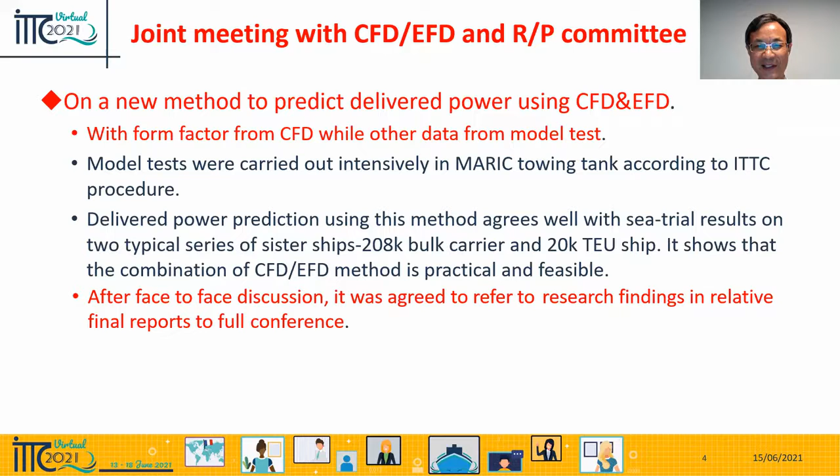SOS has contacted the CFD-EFD committee on how to proceed with CFD-related issues, and the R/P committee regarding the load variation coefficient. SOS also contacted the Maneuvering in Waves committee and Quality System Group. A joint meeting was also held with CFD-EFD and R/P committees on a new method to predict delivered power using CFD and EFD, with the form factor from CFD, while other data from model tests. After face-to-face discussion, it was agreed to refer to research findings in relative final reports to the full conference.

From the AC Chairman, SOS has got major comments from IMO MEPC meetings. Either the Raven method should be improved with sufficient validation, or a new method should be proposed. ITTC sea trial procedure 2017 version was accepted by MEPC 73. The 2014 guidelines shall be updated accordingly to reflect the new progress. Discussion on EEDI phase 4 and early implementation for container ships, because they are far below the current baseline. Terms of reference after coordination with AC.

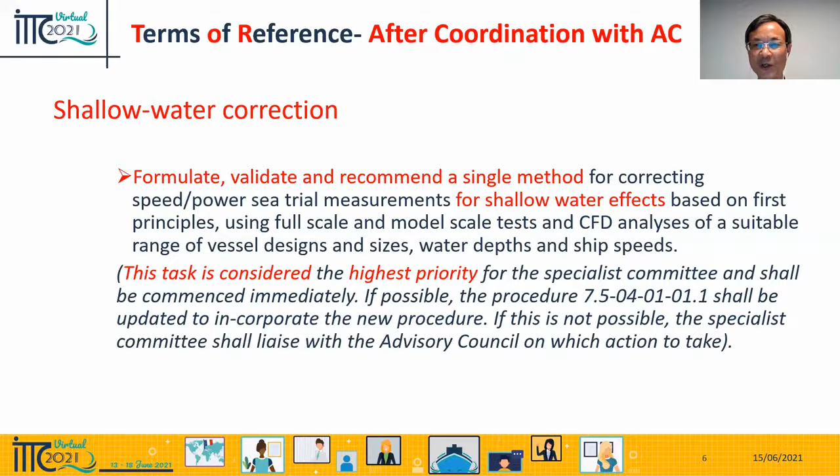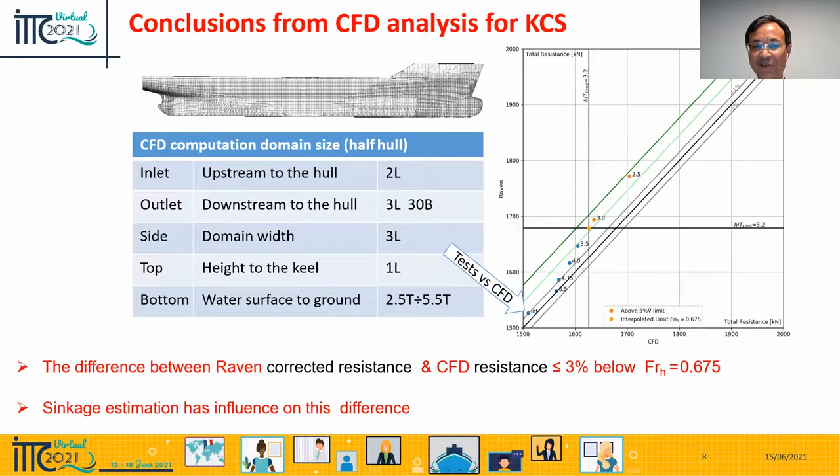Shallow water correction: to formulate, validate, and recommend a single method for shallow water effect. This task is considered the highest priority. During this term, work conducted includes CFD analysis, model tests, and a new water depth limits study. Conclusions from CFD analysis for KCS: the difference between the Raven method and CFD method is within 3% below a water depth Froude number 0.675. Sinkage estimation has influence on this difference.

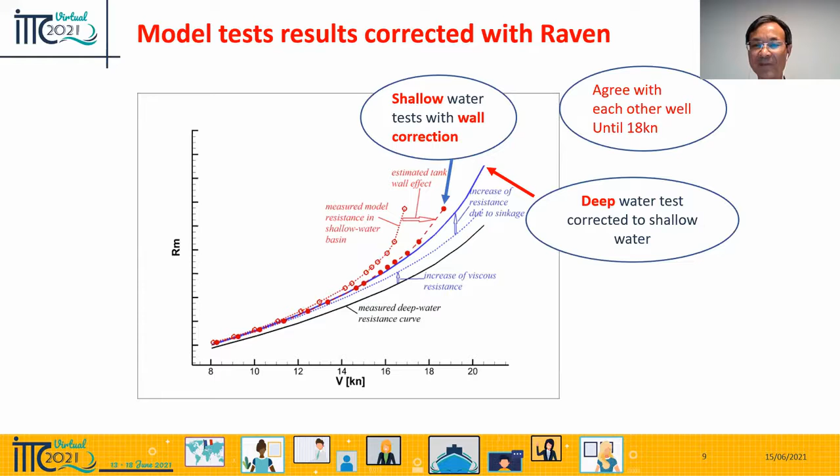Model test results corrected with the Raven method: shallow water test with wall correction and deep water test corrected to shallow water agree with each other quite well until 18 knots. After further study, SOS concludes the Raven method provides more consistent and accurate correlation, thus it is accepted by SOS as the only method for shallow water correction.

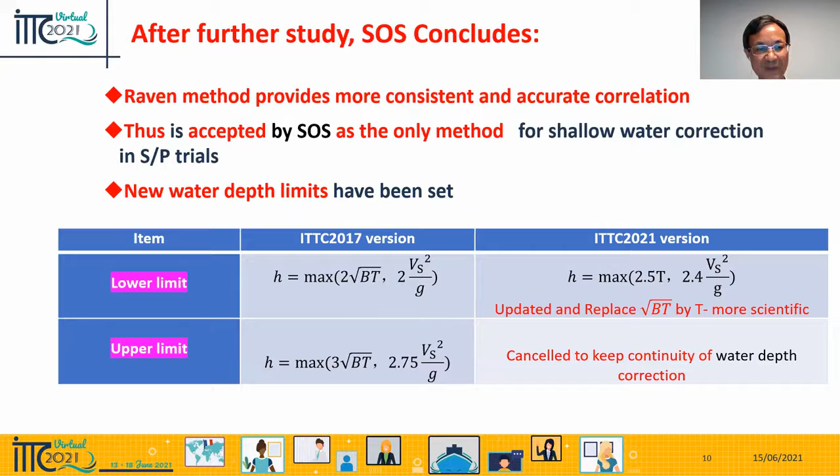New water depth limits have been set. For the lower limit, it was updated and replaced square root of BT by T. This is more scientific. For the upper limit, it was cancelled to keep continuity of water depth correction.

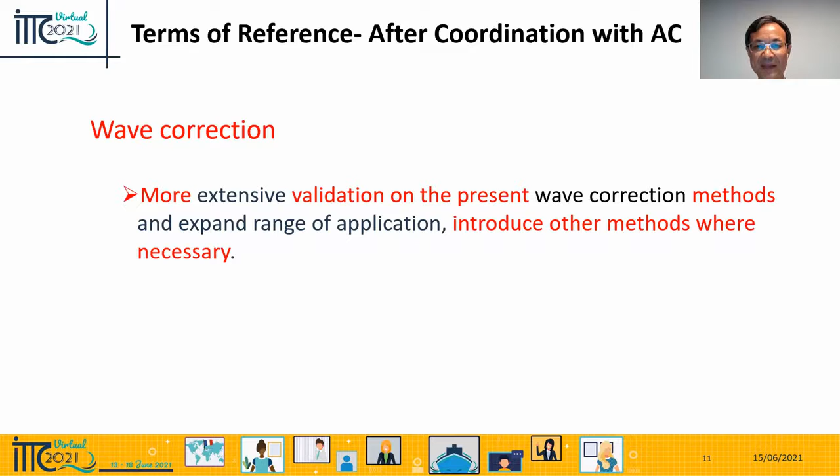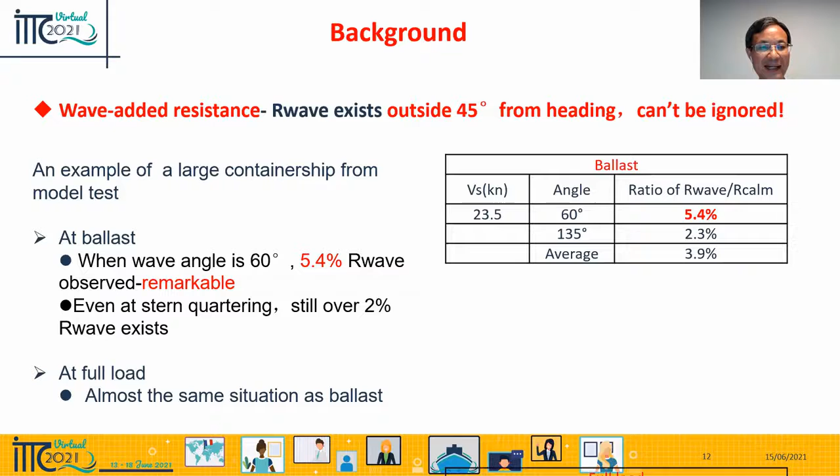Wave correction: more extensive validation on the present methods, and introduce other methods when necessary. It is observed wave added resistance outside 45 degrees from heading cannot be ignored. This is an example of a large container ship from model test. At ballast, when wave angle is 60 degrees, 5.4% R wave is observed. This is very remarkable. In fact, even at a stern quartering, still over 2% R wave exists. At full load, almost the same situation as ballast.

In the ITTC trial procedure, it has clearly specified the ship should head into the dominant wave or wind. However, for large vessels such as VLCC and VLOC, 1+2+1 double runs could last about 10 hours. During this period, wave direction is likely to change over 45 degrees. While the iterative method is often used, the heading is required unchanged. This is the first situation.

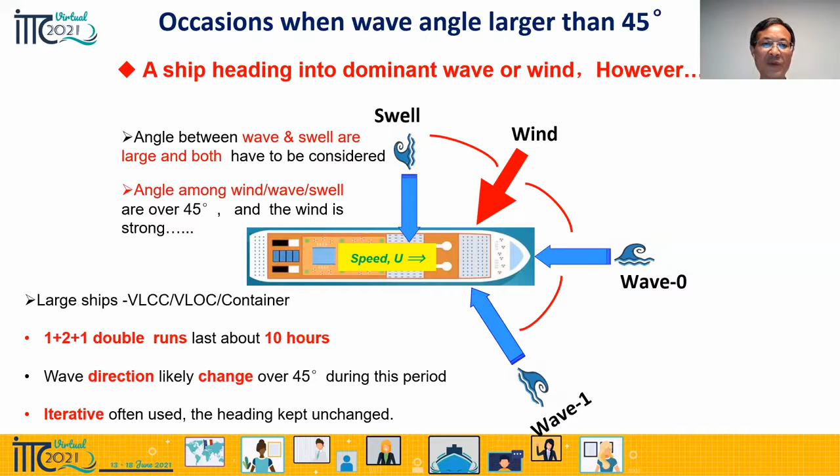Another situation is when the angle between wave and swell is large and both have to be considered. Another situation is when the angle among wind, wave, and swell is over 45 and the wind is strong. For such kind of case, we will have the chance to encounter wave angles larger than 45. Unfortunately, the present empirical method can't deal with the above situations when ship lines are not available. Thus, it is necessary to develop a new empirical method to cover wide wave angles when ship lines are not available.

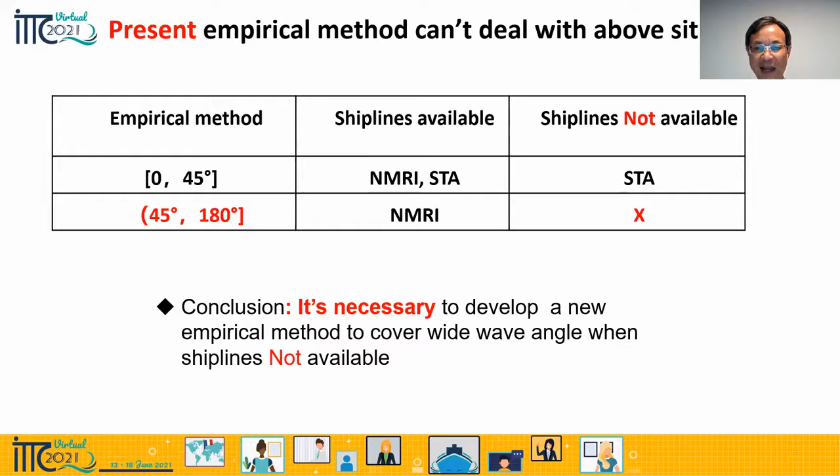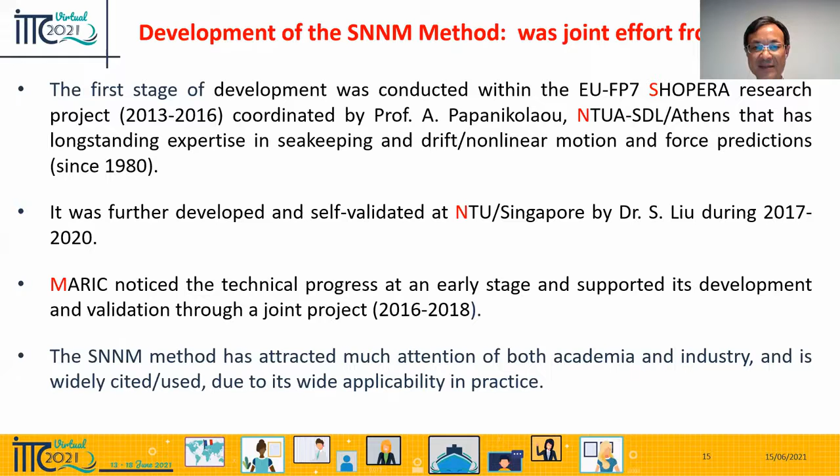Development of the new method was a joint effort from SHOPERA, NTUA from Athens, NTU from Singapore, and MARIC from China. The new method was on the basis of Faltinsen and J&F formula, with two important improvements.

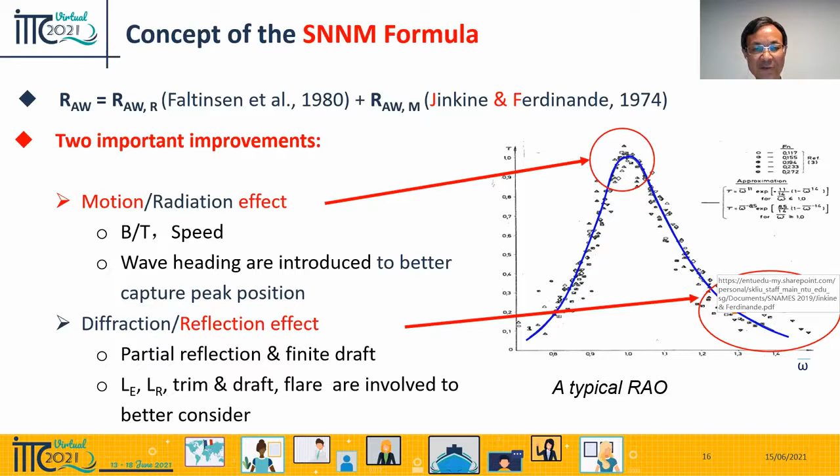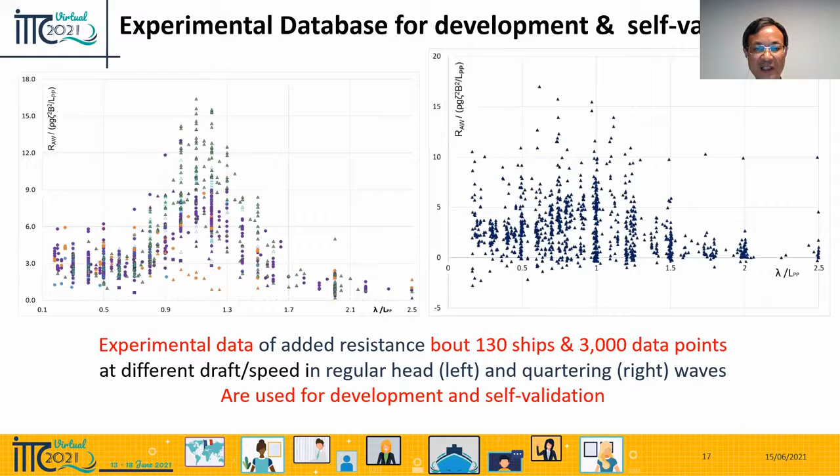B over T, speed, and wave heading are introduced to better capture peak position, to better simulate motion effect, while partial reflection and finite draft, length of entrance and run, trim and draft, and flare are involved to better consider reflection effect. Experimental data of about 130 ships and 3,000 data points are used for development and self-validation of the new method.

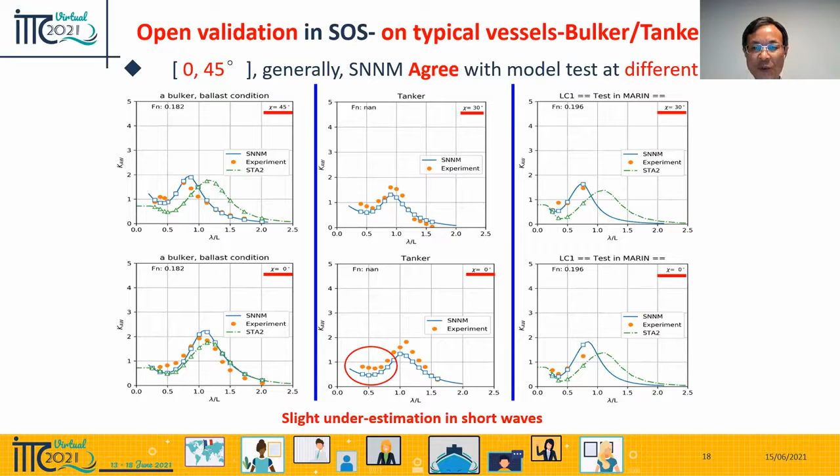Open validation in SOS on typical commercial vessels: bulkers, tankers, and containers. In the first region, from 0 to 45 degrees, generally the new method agreed with model test at different angles, although slight underestimation in short waves was observed. While in another region, from bow quartering until following, the new method agreed with model test at different Froude numbers and different wave angles.

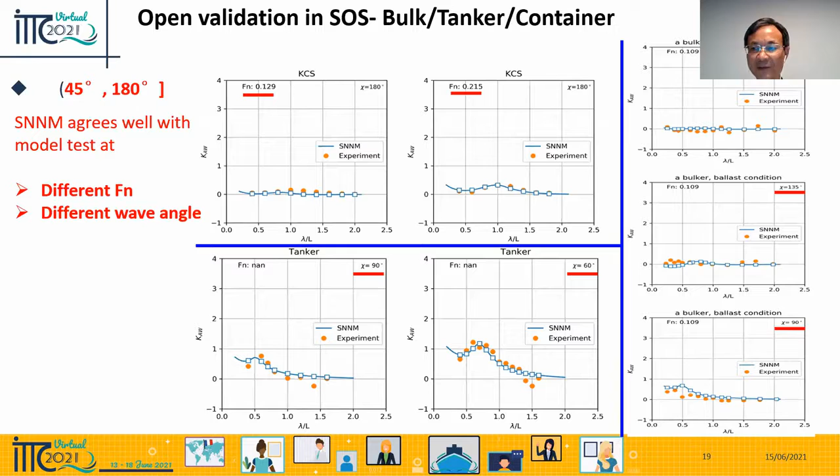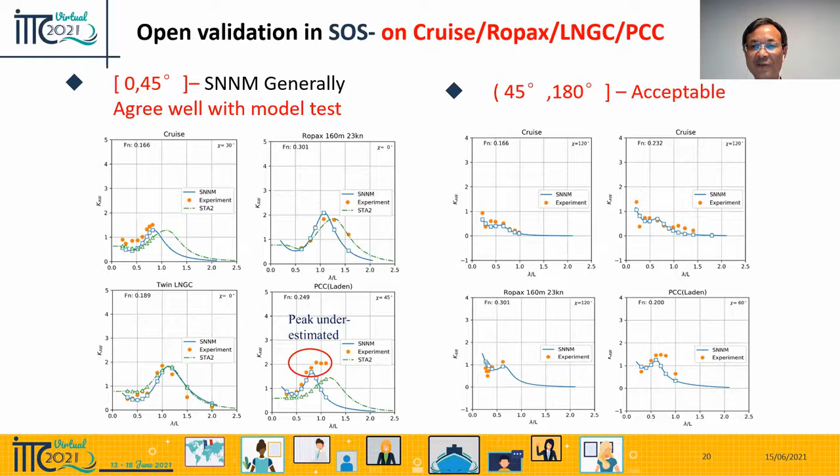Open validation on other vessels, such as cruise ships, RoPax, LNGC, PCC, etc. In the first region, from 0 to 45 degrees, the new method generally agreed with model test, while in the other region, from 45 to following, the result is acceptable.

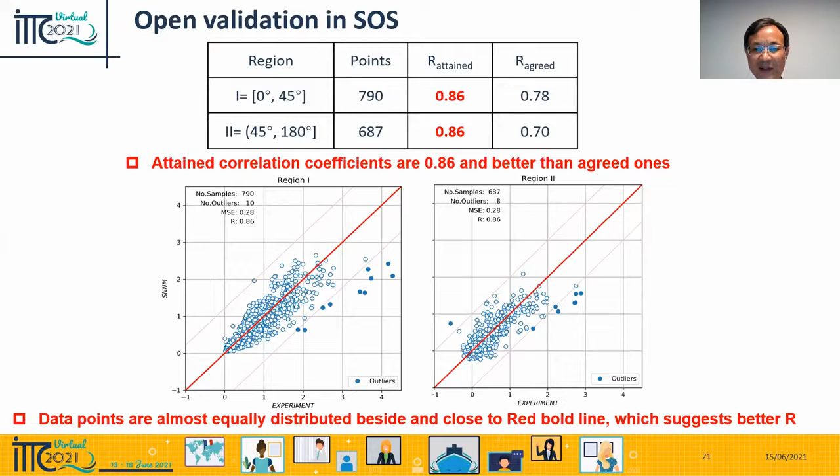From the open validation in SOS, we can see from the table the correlation coefficient is 0.86. This is much higher than the agreed ones. And also from the figures, we can see data points are almost equally distributed beside and close to the red bold line, which suggests a good correlation factor.

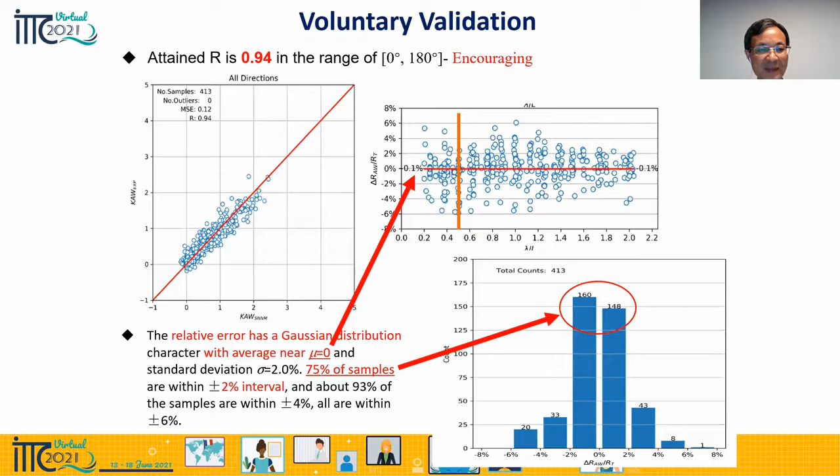As to voluntary validation, the correlation coefficient is 0.94 in the whole range. This result is quite encouraging, and the relative error has a Gaussian distribution with average near 0, and 75% of sample points are within 2% interval.

Summary and conclusion on this new method validation. On March 16, an AC meeting was held to discuss the method. After further discussion and voting, AC agreed to include the method into the sea trial procedure, thus to make the procedure more complete, competent, and valuable.

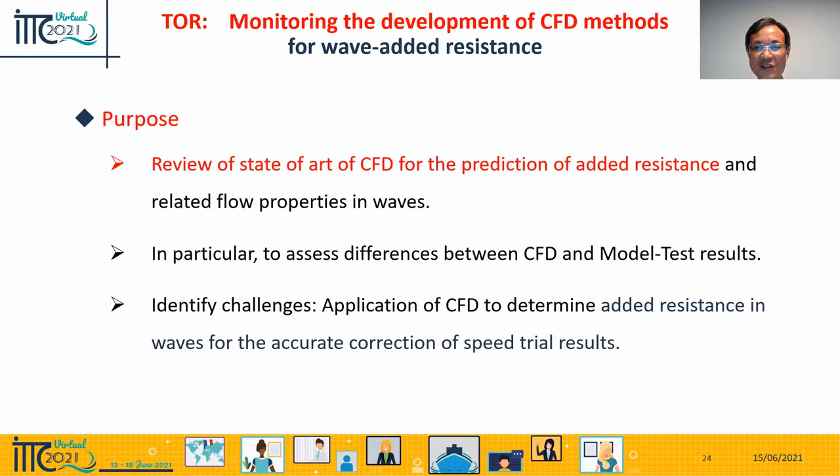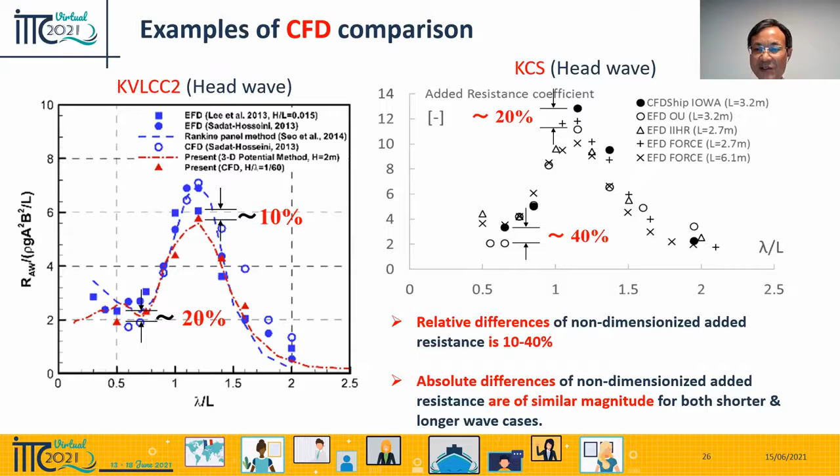From the comparison, we can see relative differences of non-dimensionalized added resistance are within the range of 10 to 40%, while the absolute differences are of similar magnitude for both shorter and longer wave cases.

This is the experimental data of all headings available. We have S175, KCS, etc. at different speeds, at different model lengths, from different model basins. Generally, open test data with geometry is not enough for CFD to compare. Thus, to have high fidelity test data of different hull forms from different facilities is important.

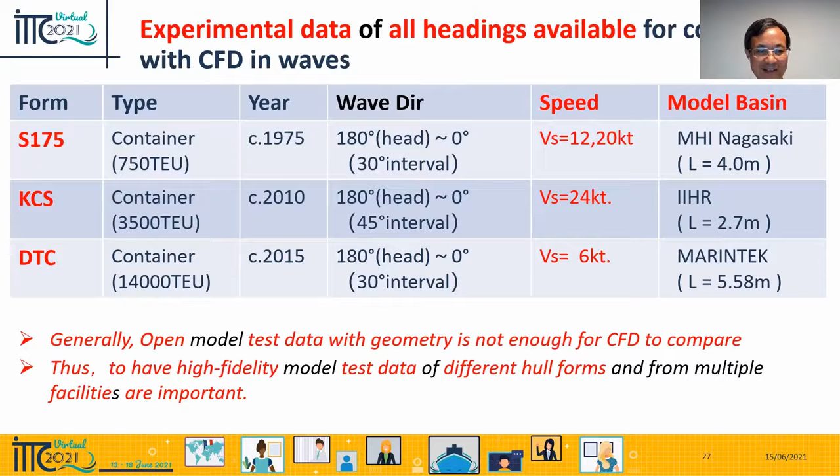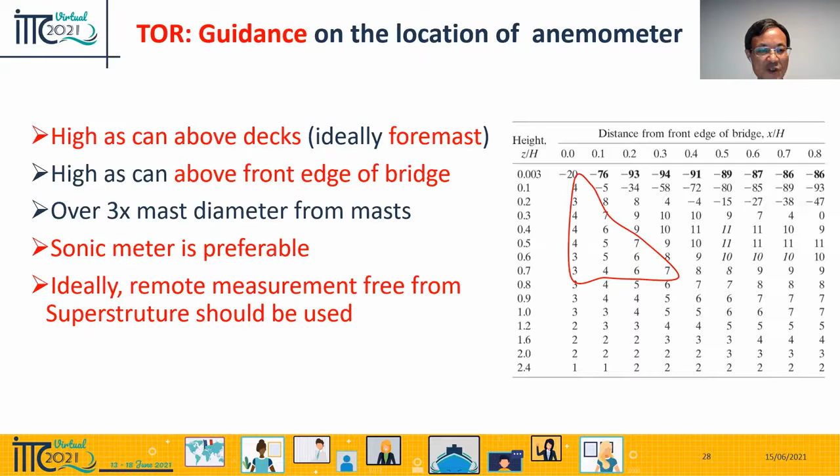Guidance on the location of the anemometer: as high as can be above decks, above the front edge of the bridge, and the sonic meter is preferable. Ideally, remote measurement free from superstructure should be used. This is a comparison of meter location and the filtering process.

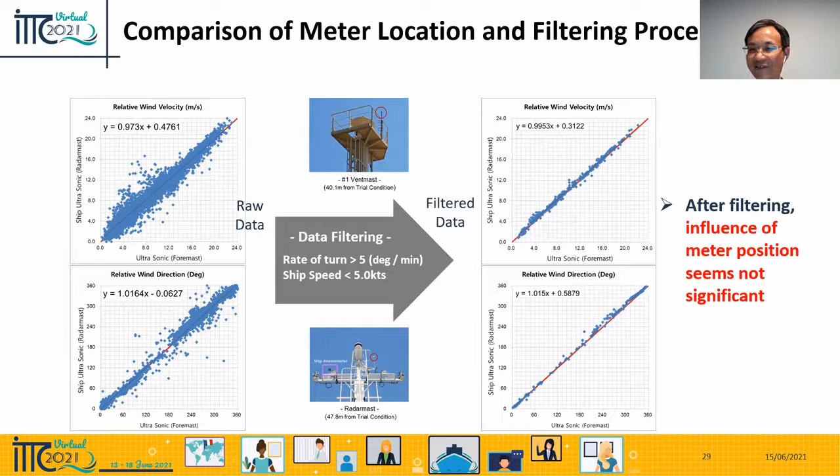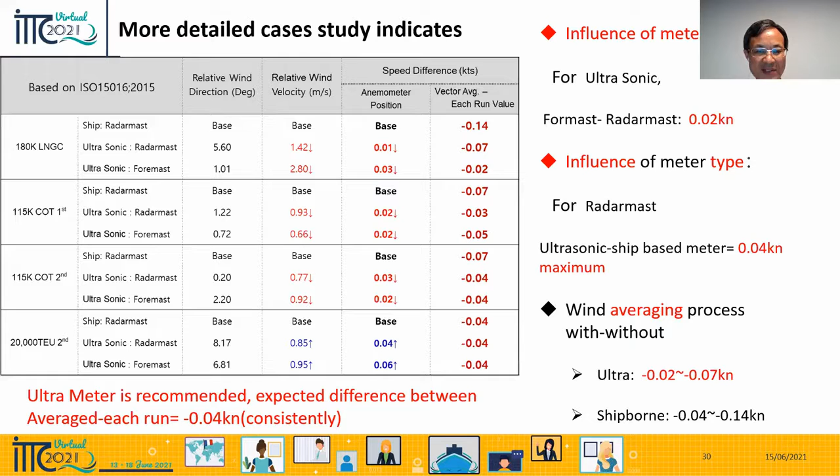After filtering, we can see the influence of meter position seems not so significant, with a difference of 0.02 knots, while the influence of meter type is 0.04 knots maximum. And the wind averaging process with and without the ultra meter is minus 0.02 to minus 0.07 knots. So the ultra meter is recommended, and the expected difference between averaged and each run is minus 0.04 knots. This result is consistently negative.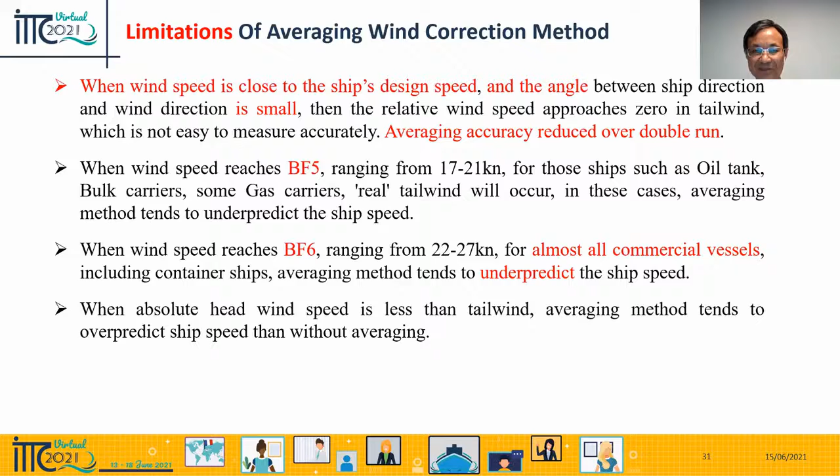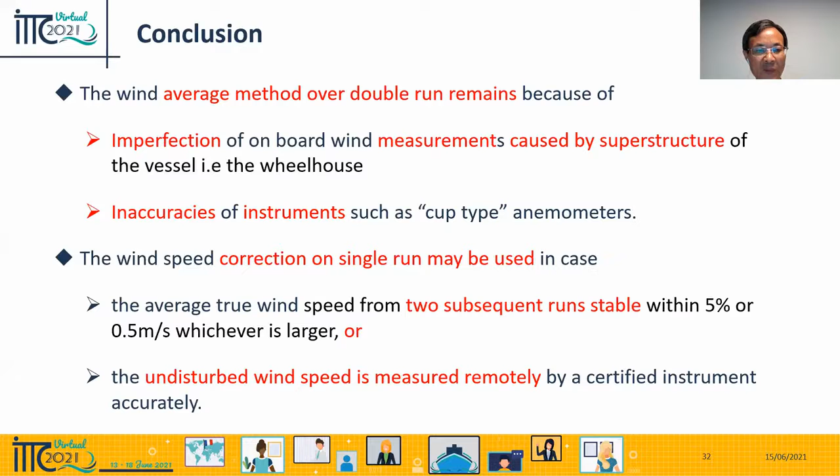Conclusion from the study: the wind averaging method over the double run still remains because of imperfect measurement caused by superstructure and inaccuracies of instruments such as cup type. However, correction on a single run may be used in case two subsequent runs are stable or undisturbed wind speed is measured remotely.

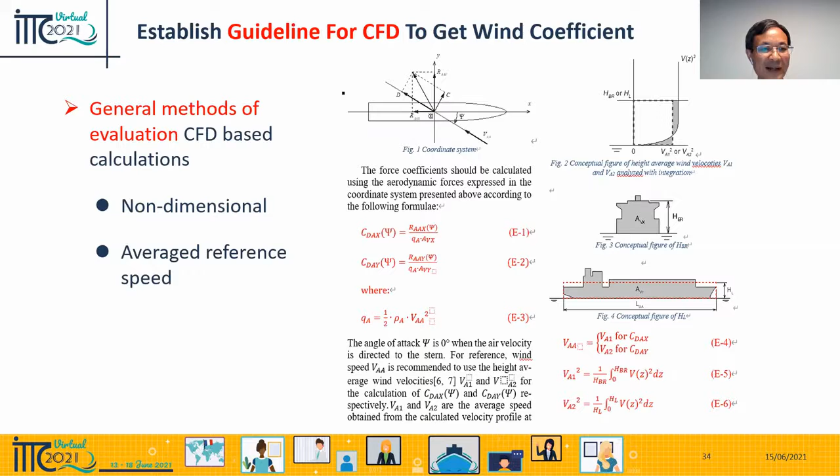Establish guideline for CFD to get wind coefficient. This is a completely new guideline, which includes two parts. The first part is general practice for CFD approach, while another part is general methods of evaluation.

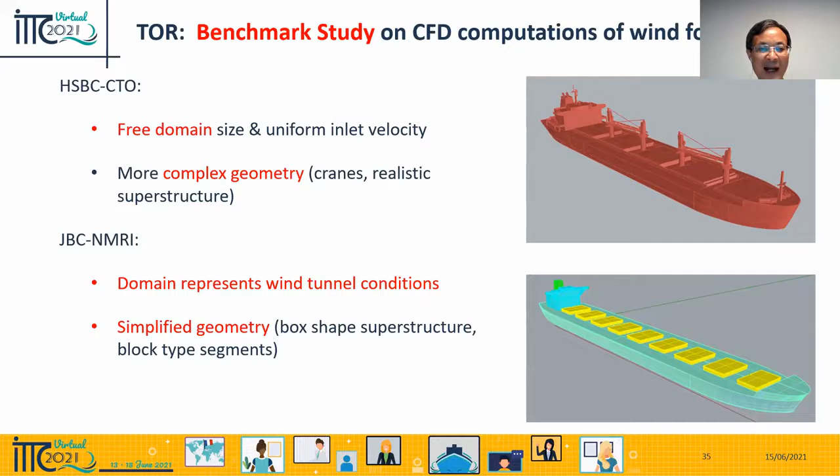Two cases are used for benchmark study: one is HSBC from CTO, another is JBC from NMRI. From the comparison between CFD and wind tunnel test, we can see for HSBC the difference is about 25%, while for JBC it is about 20%.

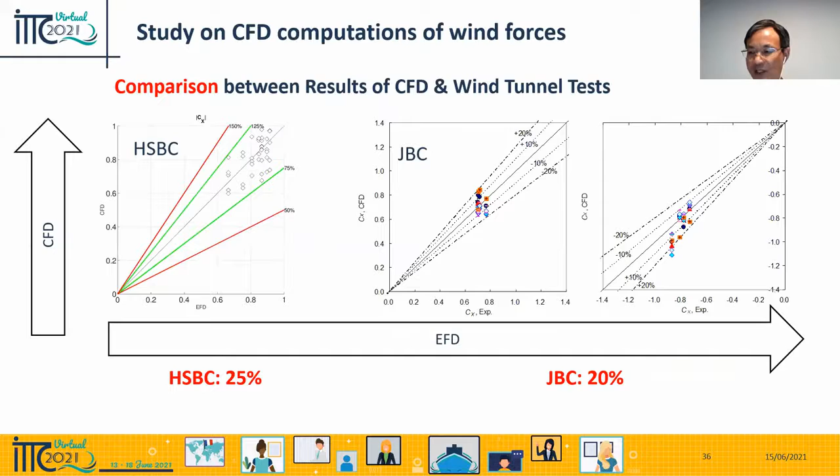Averaged wind velocities as representative wind velocity are used here. We are surprised to find for both JBC and HSBC, RMSPE of CX remarkably reduced after using averaged wind speed as reference. From the right figures, you can see this.

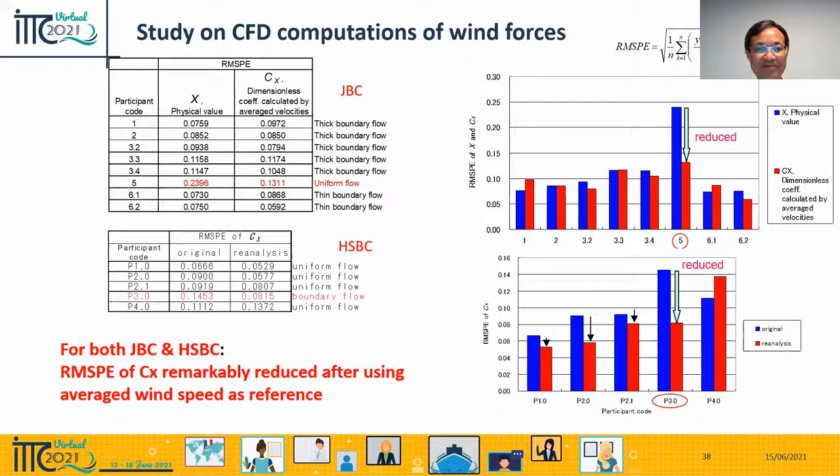Current correction, possibility to use long track. It is proved to be premature at this stage.

For power correction and direct power method, shaft rate can be derived with the following formula. You can see xi v has been taken away due to skipping Lackenby method when compared with the 2017 version.

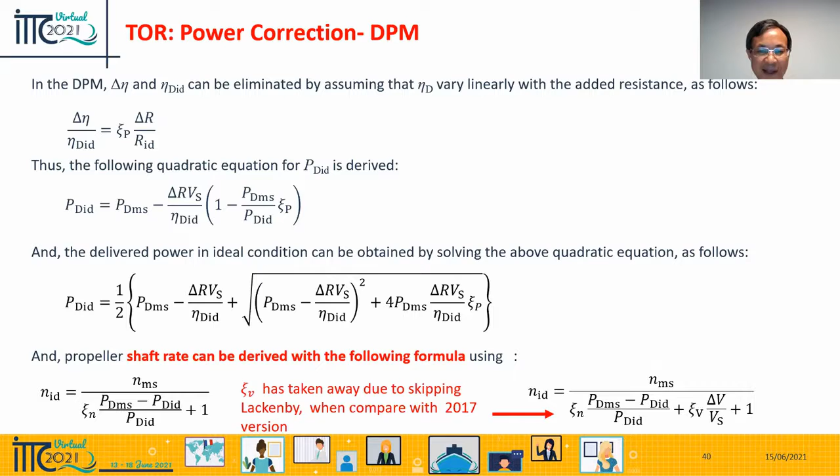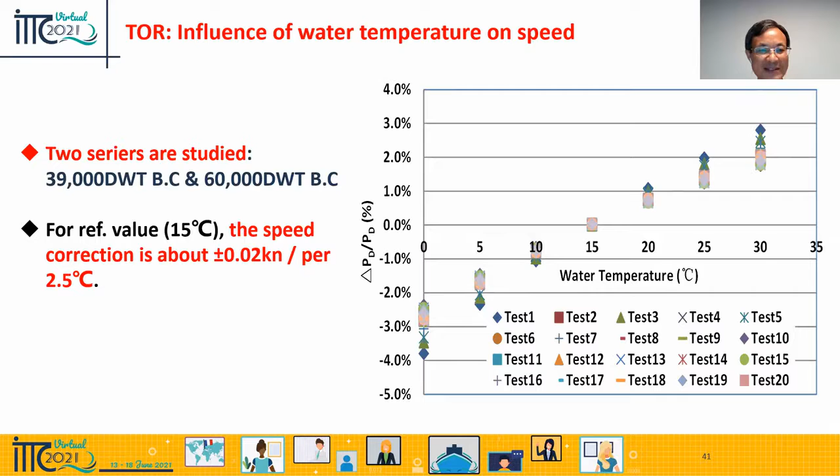Influence of water temperature on speed. Two series are studied, and the conclusion is the speed correction is about 0.02 knots per 2.5 centigrade.

Noise in the measured data and the measurement error: dominant component is from shaft power, which contributes 60% of the total uncertainty. So shaft torque should be measured more precisely.

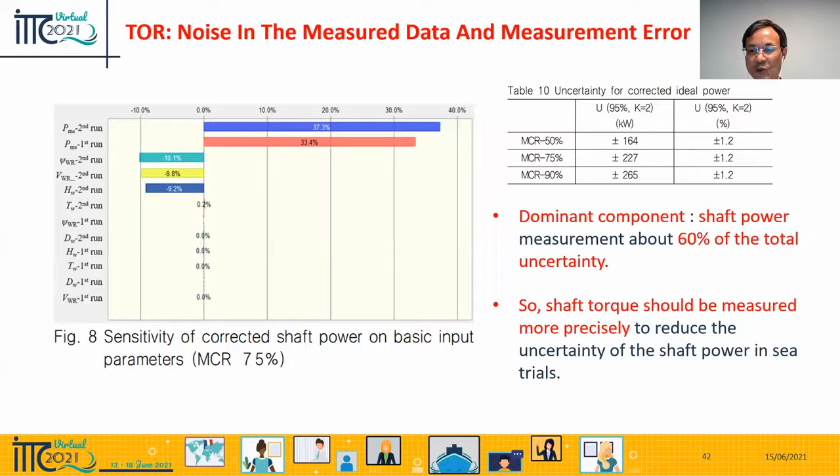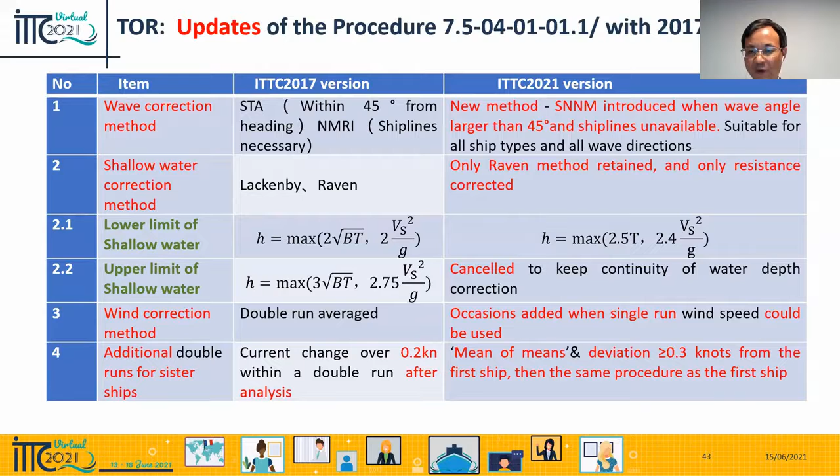For wind correction method, occasions were added when a single run could be used. For additional double runs for sister ship, it specifies when mean of means and deviation is greater than 0.3 knots from the first ship, then the same procedure as the first ship should be used.

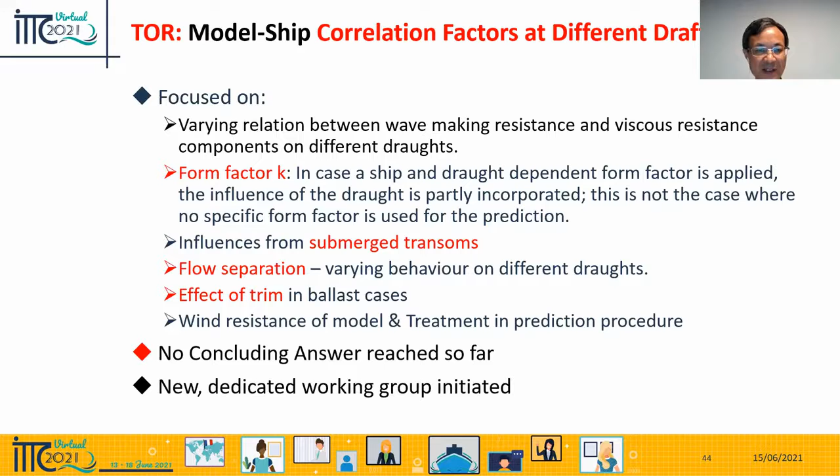Model-ship correlation factors at different draughts. This focused on form factor, submerged transoms, flow separation, and effects of trim.

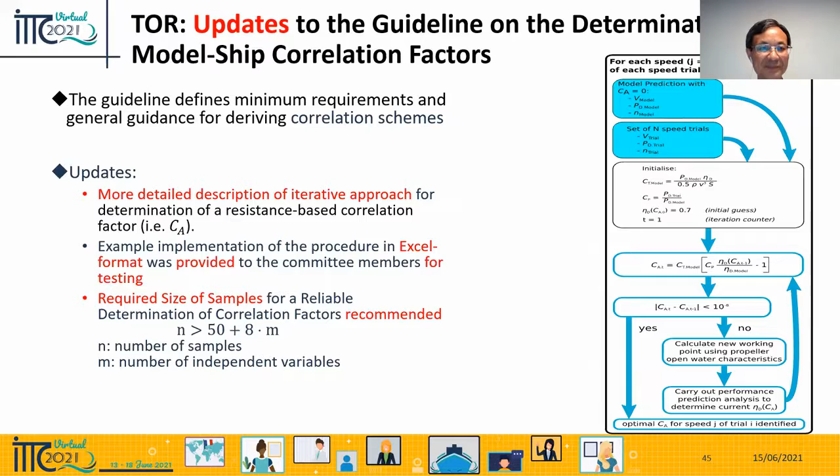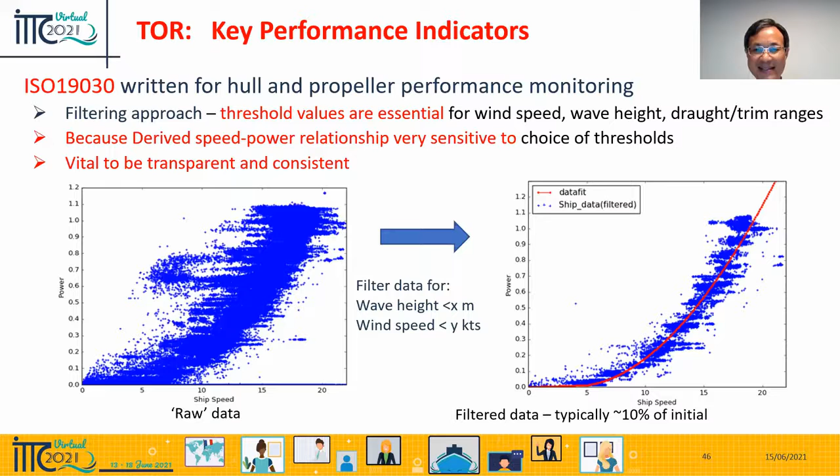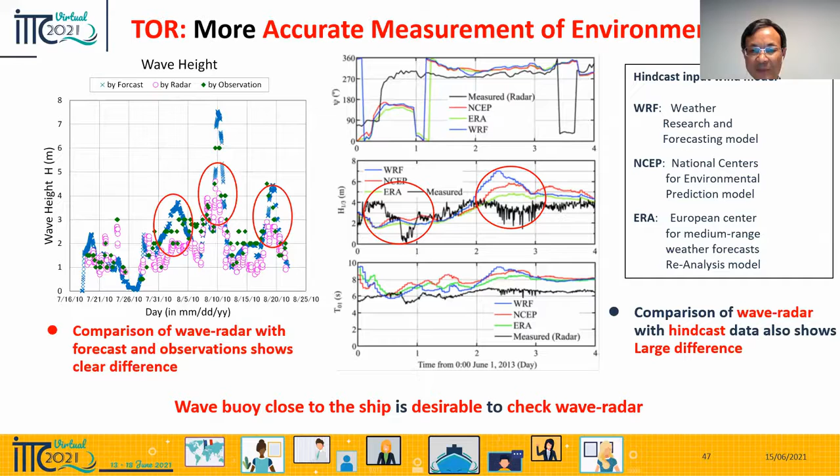Comparison of wave radar with hindcast data also shows large difference. So wave buoy close to the ship is desirable to check wave radar to ensure the accuracy.

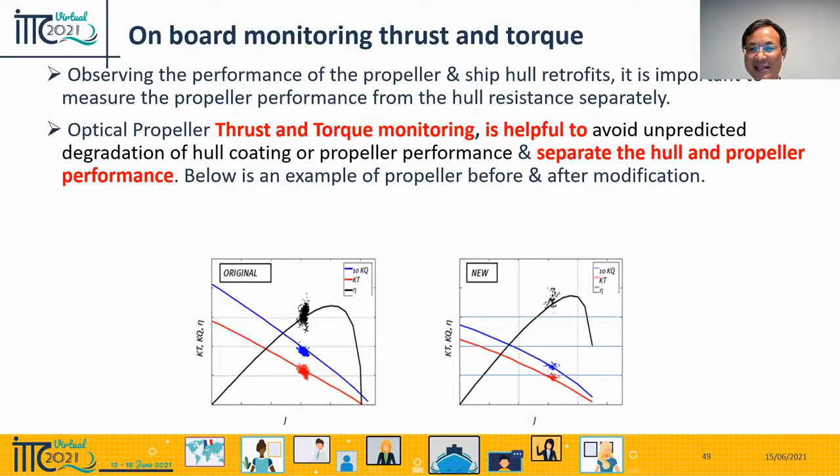Multi-layered Doppler sonar is also useful to measure speed through water, while thrust and torque monitoring is helpful to separate hull and propeller performance.

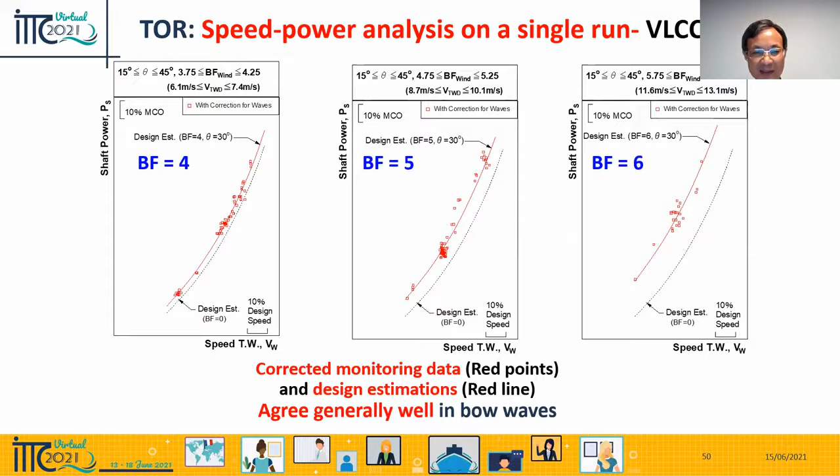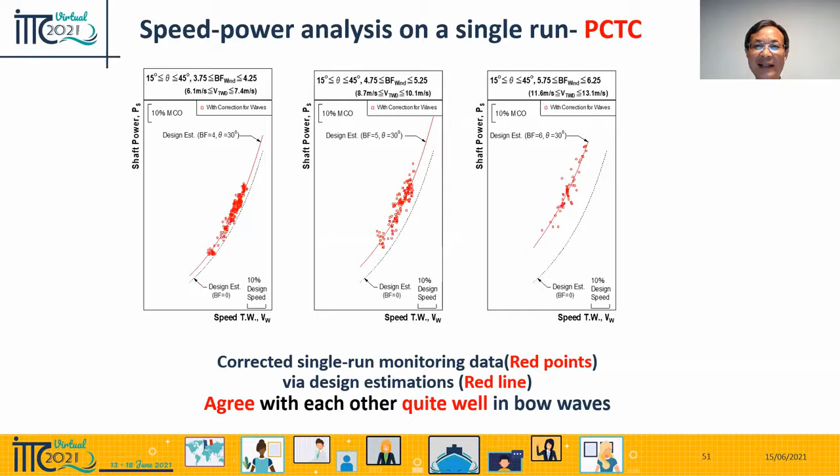For PCTC, we almost can get the same conclusion. So this study on a single run is worth continuing in the future.

Monitoring ICT technology: LIDAR laser scanner is a promising technology which could be used for wind measurement.

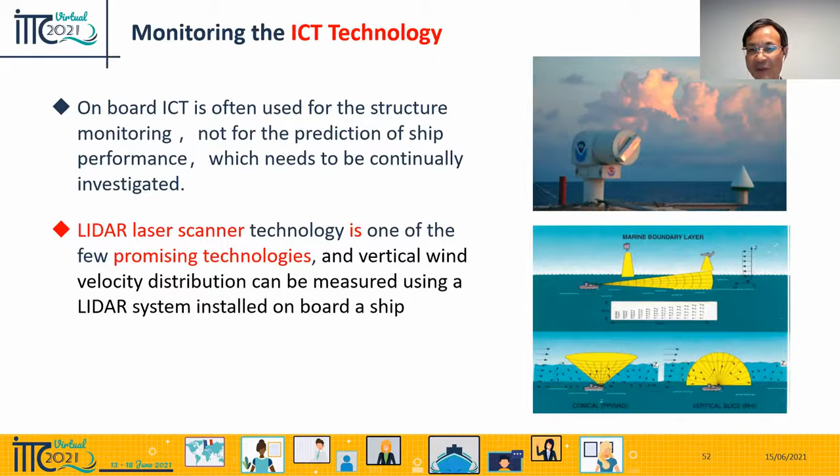Main conclusions here will be very brief. First, the Raven method was accepted exclusively as shallow water correction.

For shallow water testing, it needs tank wall correction. This is very, very important. From the benchmark study of CFD for wave added resistance, it shows deviation from tests is about 20%.

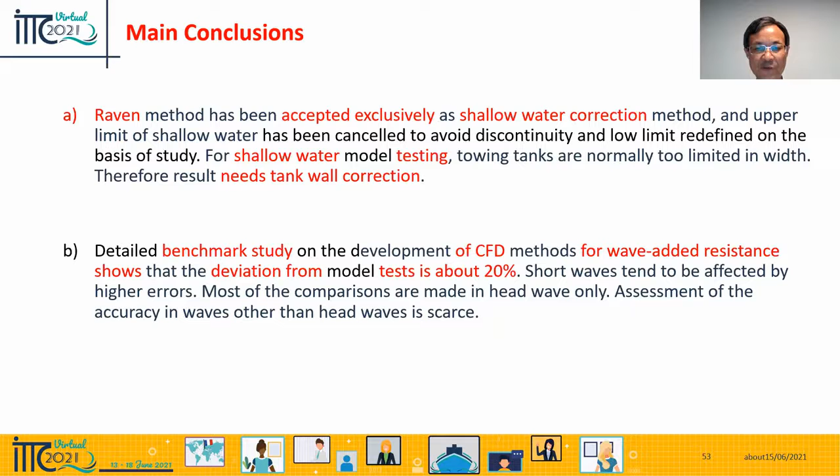A new wave added resistance prediction method was developed and included in the sea-trial procedure. Limitation of averaging wind correction method identified, and averaging method kept due to the influence of superstructure, etc.

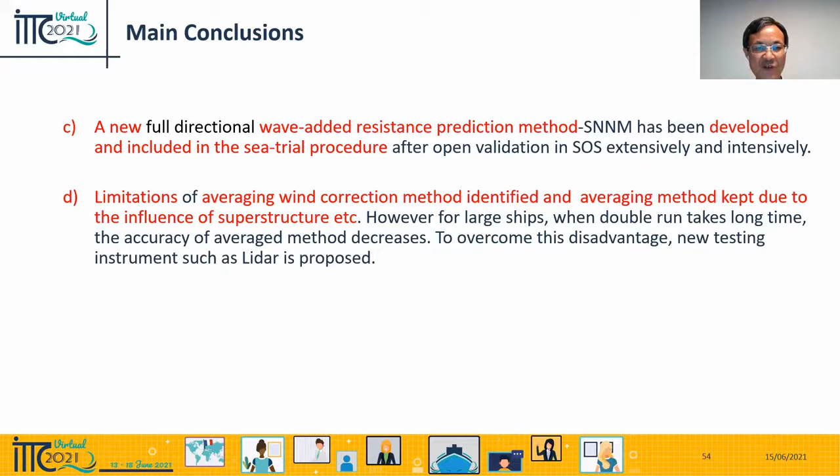New guideline on CFD-based wind resistance coefficients has been made, and guideline for derivation of correlation factors updated. Speed power procedure has been further updated to reflect all research findings so far.

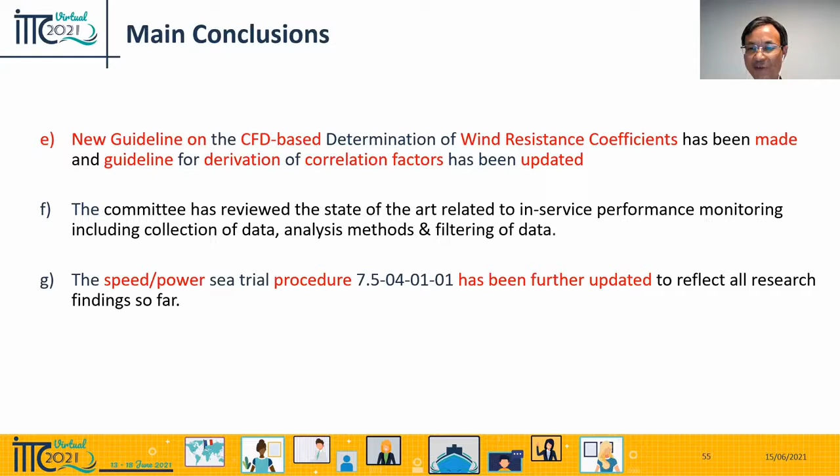Recommendation to the full conference is one procedure, two guidelines, is expected to be adopted.

My recommendation for future work: first is address issues related to surface roughness at full scale, and provide technical support to ISO and IMO when updating files such as ISO 19030, ISO 15016.

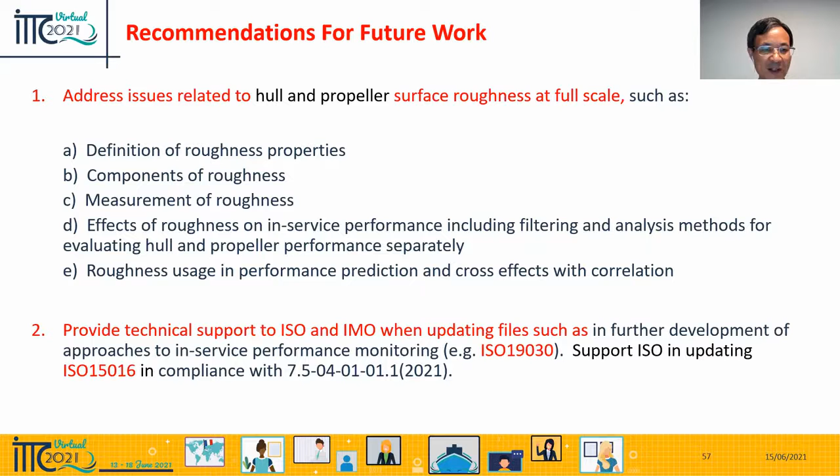Address aspects of speed power procedure and update. The last is to study and update two guidelines: on model-ship correlation factors, and on CFD-based wind coefficient.

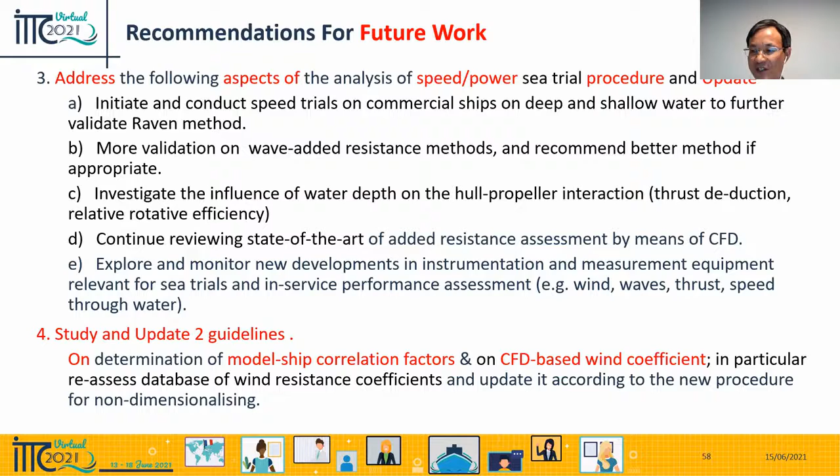At this moment, I'd like to express my heartfelt gratitude to SC for great support and guidance, especially SC Chair Professor Strasser, Secretary Ober, and G2 Chair Dr. Leszek.

Thanks also go to the development team of the shallow water and wave-added resistance correction method, especially Dr. Raven, Professor Papanikolaou, Dr. Liu, Dr. Feng. The most important thanks should go to all SOS members for the joint and sustained efforts.

Well, I'd like to stop here. More detailed information, please refer to the SOS committee report and the PPT on the website. Thank you all for your attention.

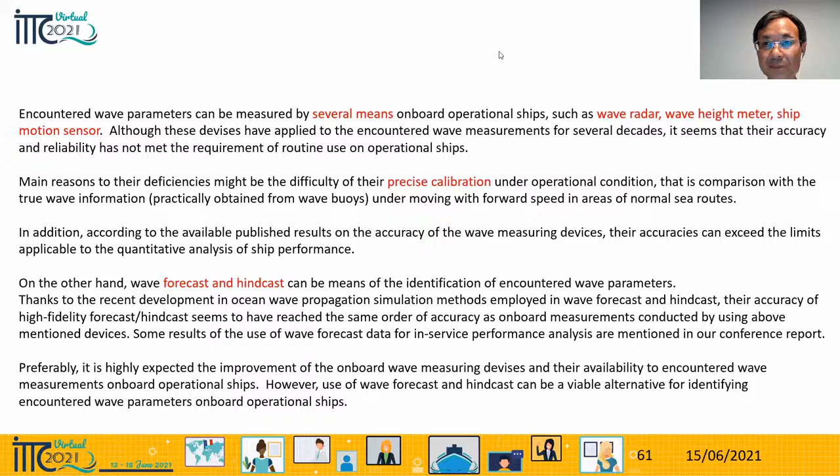Yes, where can I find the question? Actually, I'm trying to show the... I will stop sharing first, and your turn. Okay, actually, I think I can see the question, but I don't think it goes to you. But it's written during your presentation.

I will read again: what is the doubt on the physical background of square root BT? Square root B multiplied by T. Okay, yeah, you can see the chatting. Yes, I see this. Okay, I will make a brief introduction on this.

In our 2017 version sea-trial procedure, we used 2 multiplied by square root BT, where B is the breadth of the ship and T is the draft. We used this parameter as the low limit of shallow water, while 3 multiplied by square root BT was the boundary from shallow water to deep water. After discussion in SOS, we found this parameter is not so scientific. So during this term, we changed square root BT into just T, the draft.